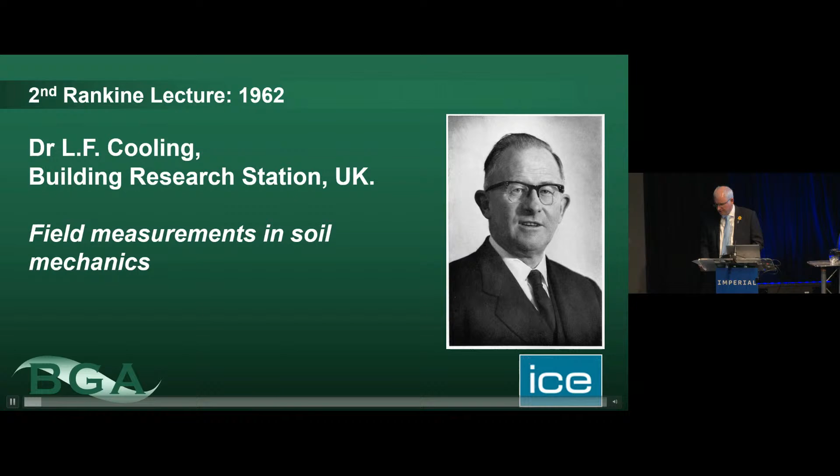Kenichi Soga, the Donald H. McLaughlin Professor of Mineral Engineering and Distinguished Professor of Civil and Environmental Engineering at the University of California in Berkeley.

The title of his lecture is From Geo-monitor to Geo-adapt, Leveraging Distributed Sensing and Data Analytics for Performance-Based Design, Construction and Maintenance. I now call upon Professor Malcolm Bolton of the University of Cambridge to formally introduce the lecturer.

When appointing a new academic colleague, there are a few essential attributes that one should look for. Have they an interesting story to tell? When asked a question, can they organize their thoughts quickly and answer clearly? Do they know the scholarly essentials of their discipline, and can they teach them?

At a more strategic level, our previous head of department at Cambridge, Anne Dowling, spoke of the search for the T-shaped academic, somebody with strong roots in a recognized discipline, who was beginning to grow a strong stem of new knowledge, but also someone who showed signs of branching out to connect with other disciplines and to address unexplored challenges.

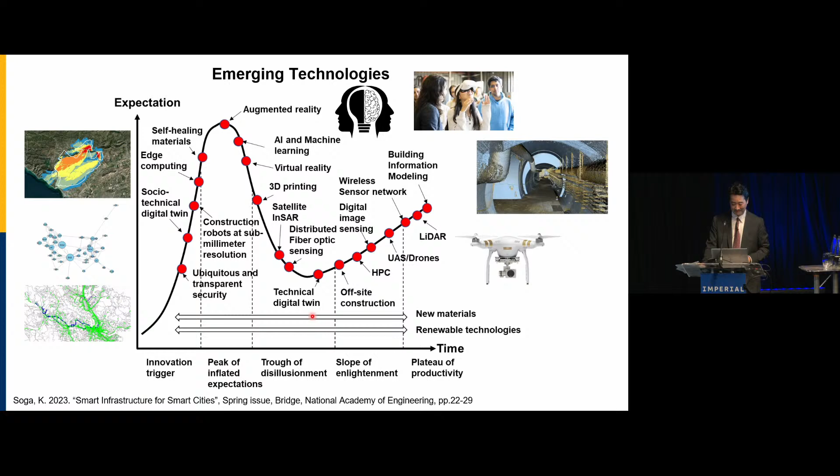Today's focus is geotechnical monitoring for detecting movements. We now employ technologies such as computer vision, LiDAR, and UAV to capture infrastructure movement. We also began using satellite-based monitoring. The development of wireless sensor networks over the past decade has provided significant opportunities for us to continuously monitor geotechnical structures, particularly in remote and difficult to access locations.

Later in this presentation, I'll discuss the potential role of distributed fiber optic sensing. The key takeaway from this slide is the range of precision offered by these technologies. Data accuracy varies from 10 to 20 millimeters using satellite measurements to sub-millimeters, less than 0.1 millimeter, with camera-based and fiber optic sensing technologies. As a geotechnical engineer, this level of precision is essential for us to make informed engineering decisions.

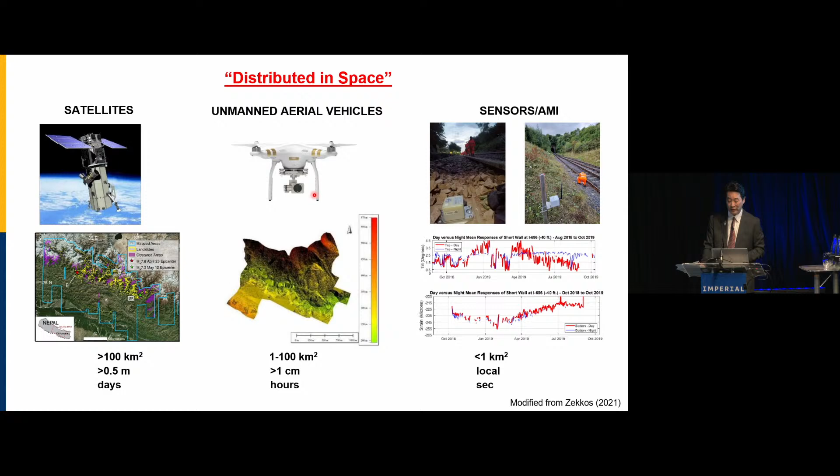For me, distributed sensing refers to measurement that distributes across space, time, and multiple sensors. The slide illustrates the spatial variation captured by different sensing technologies like satellites, UAVs, and sensors at local scale. It demonstrates how these technologies enable infrastructure monitoring across various spatial scales.

During my time at Cambridge, we worked on developing a wireless sensor network system. Over time, this technology has evolved to support large mesh networks. These networks can achieve hopping distances of over kilometers, enabling spatial coverage through multiple interconnected wireless sensor networks, as well as creating redundancy to the system.

One of the most significant achievements in wireless sensor technology is power efficiency, which enables data collection over varying time intervals. For certain measurements, a low sampling rate is sufficient. With current technology, if readings are taken once every hour, batteries such as these can sustain monitoring for 20 to 25 years without changing them.

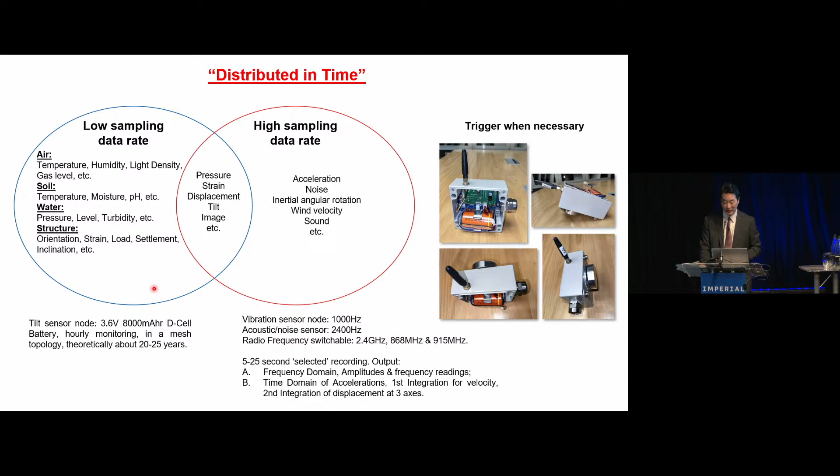However, some measurements, such as acceleration and noise, require high-frequency data collection, especially during crucial times. Since a large volume of data is generated, these batteries cannot sustain continuous signal transmission for a long period. The key innovation lies in the ability to trigger data collection only when necessary, optimizing power consumption while ensuring crucial data is captured when needed.

Sensors can be strategically distributed within a system to capture detailed and continuous data. For example, the tunnelling machine is equipped with numerous sensors that record hundreds to thousands of data variables every few seconds. As the machine advances by just a few millimeters, it generates vast data sets, providing valuable real-time insights into its operation and performance.

In this conventional approach, we establish performance thresholds based on statistical distribution or engineering experience. However, in some cases, an accident may happen and performance unexpectedly falls below the defined limit. When this happens, we recalibrate the threshold. Sometimes accidents may still occur due to previously unidentified mechanisms, requiring further adjustments to these limits.

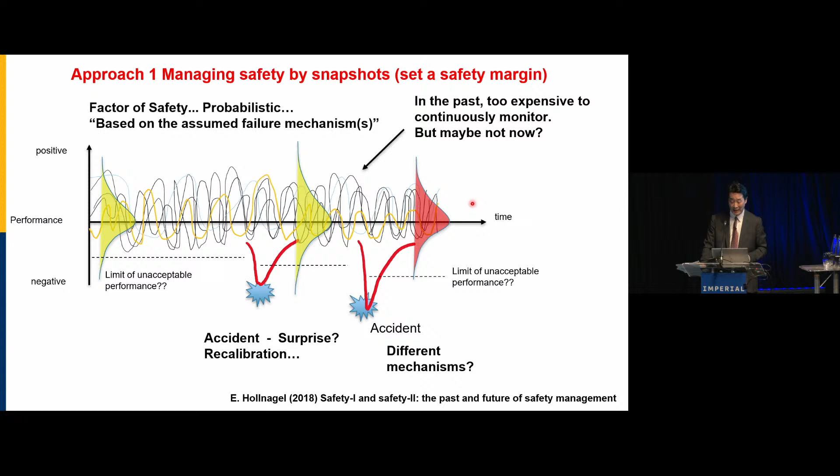In the past, continuous infrastructure monitoring was very expensive. However, with advances in sensing technology, continuous monitoring is now becoming economically feasible. With new sensor technologies and data analytics, we can now continuously measure and assess infrastructure performance.

In psychology, this approach is known as managing safety through everyday work. If we know the actual performance, we can learn how to react quickly if an event begins to unfold.

We can manage future unknown demands by reducing unknown risks. We can identify potential improvements in the design and construction processes. From a circular economy perspective, having knowledge of material performance enables resource conservation, component reuse, and sustainable design.

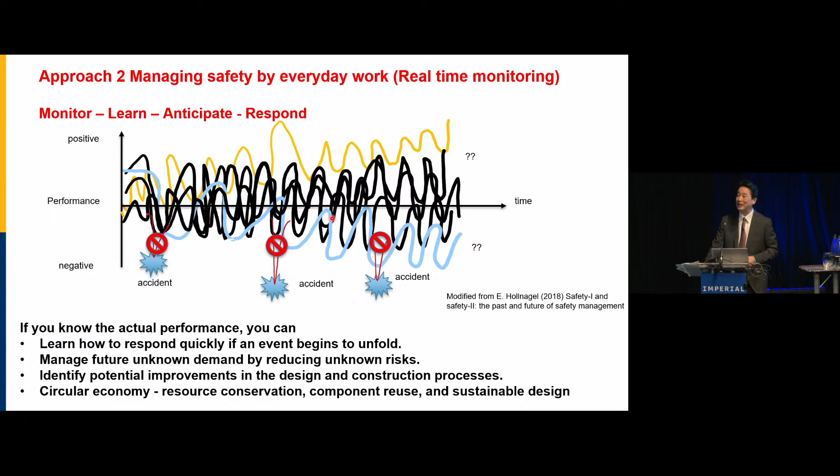Early in my career, I worked with data analysis related to the self-boring pressure meter, and then developed a self-boring permeameter with Clive, his colleague Robert Whittle, and my students. I'd like to take this opportunity to acknowledge Clive Dalton's contributions in geotechnical engineering.

The technology I'm going to present today is mostly distributed fiber optics technology, which enables continuous measurement or monitoring of strain, temperature, vibration, or noise along the length of a fiber that can span many kilometers.

I began working in this technology approximately 20 years ago because of Rab Fernie, a former chairperson of the British Geotechnical Association. He simply suggested I should explore this technology. And I did, and realized its potential for geotechnical engineering.

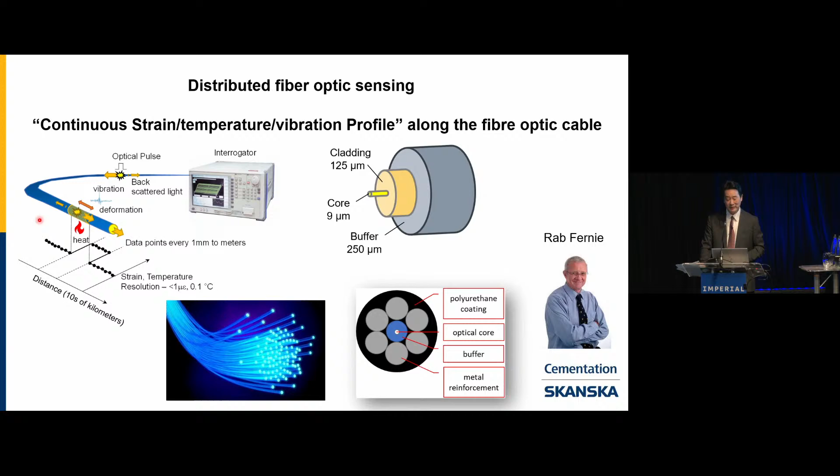This technology suits our field well because strain distribution in geotechnical structures varies spatially due to the distributed load exerted by soil. The first field trial was conducted in collaboration with Cementation Skanska and the Building Research Establishment.

This technology can be categorized into distributed temperature sensing (DTS), distributed strain sensing (DSS), and distributed acoustic sensing (DAS). The fundamental principle is the transmission of light through an optical fiber.

As the light travels, a small portion of light is backscattered at every point along the fiber. Since the speed of light is constant, at least where we live, the exact location of each backscatter signal can be determined through precise time measurements.

Then, by analyzing the frequency component of the backscattered light coming back from a given location of interest, we can extract information about the strain, temperature, acoustic vibration, or sound at that point. And this can be done for every point along the fiber.

While I cannot go into the technical details today, the key point is that this technology allows us to measure these physical variables continuously over long distances.

Let's consider an example of a pile. As a load is applied at the top of the pile, strain develops within the pile. The largest strain occurs at the top and gradually decreases with depth due to shaft friction.

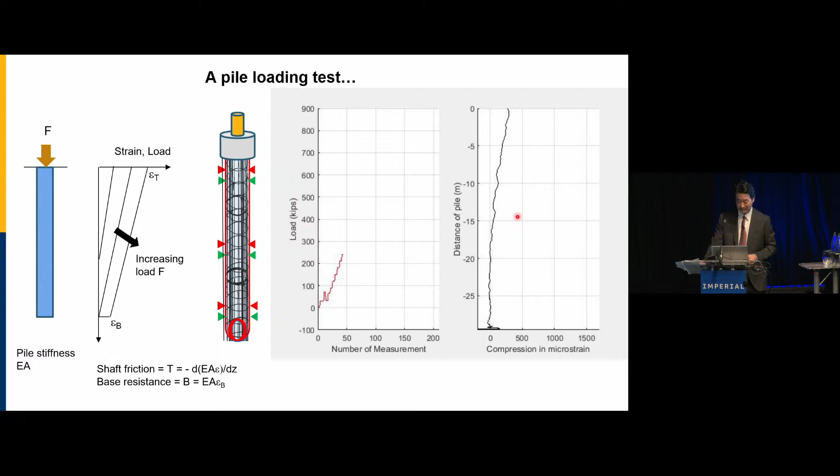The objective today is to explore the process of monitoring, learning, anticipating, and adapting in geotechnical engineering. I'll introduce new emerging sensing technology and data analytics technologies. I'll present 3 cases on tunnel, pipelines, and piles.

These case studies will examine how soil profile and construction process influence the performance of geotechnical structures. I'll also discuss how I assess actual performance versus assumed performance to derive the underlying mechanism that governs the behavior. By acknowledging the uncertainty and improving our ability to anticipate the performance, we can enhance decision-making in geotechnical engineering.

One key discussion point will be the utilization of the concept of cautious and most probable, which some of my geotechnical engineering colleagues have recently introduced within the framework of the observational method, originally proposed by Professor Ralph Peck.

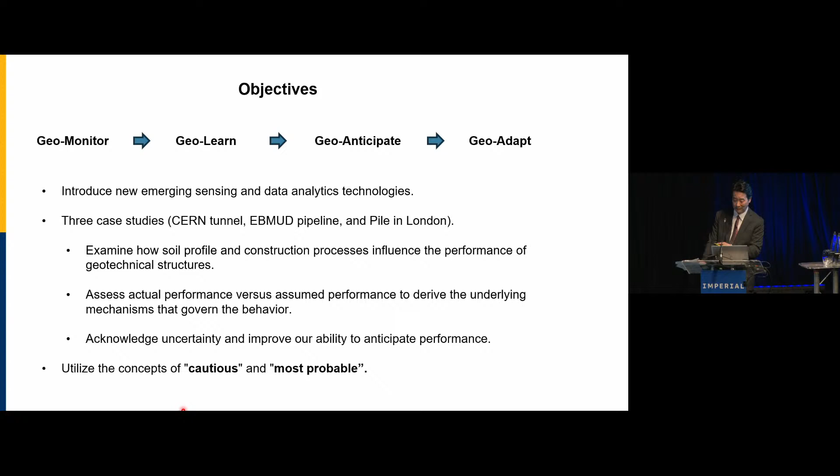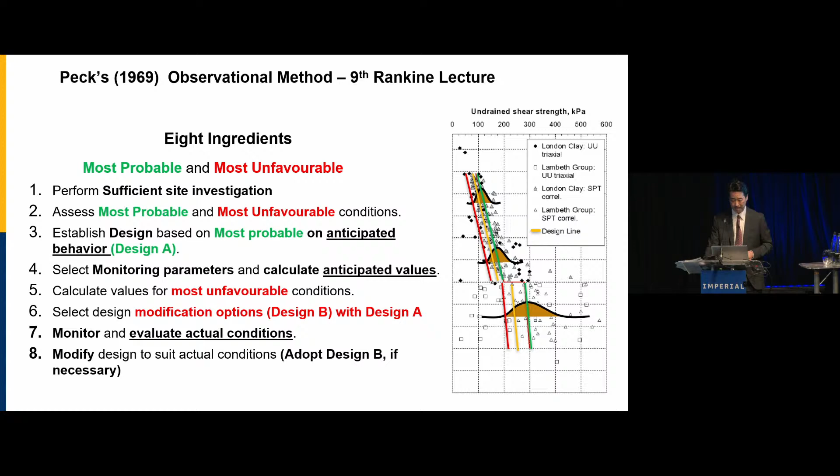Our engineering parameters, such as strength and stiffness, often exhibit statistical variability. While the distribution shown here looks like a normal distribution, it doesn't necessarily have to be. But most probable is probably located at the 50th percentile.

In contrast, the cautious value, which is commonly used in geotechnical design, is often set at approximately 1 standard deviation below the average. For the most unfavorable scenario, engineers may consider a 1 in 1,000 probability, or apply a factor of safety to the cautious parameters. In comparison, structural engineers, who often deal with brittle materials, may adopt a 1 in 20 value as a conservative estimate.

Just to remind you, Professor Peck was using this for temporary structures.

In monitoring, we typically establish target values and categorize them into different zones using a color-coded system: green, amber, red, to define thresholds. In the US, we actually use yellow in traffic signals, but I'm in the UK now, so I'd like to use amber.

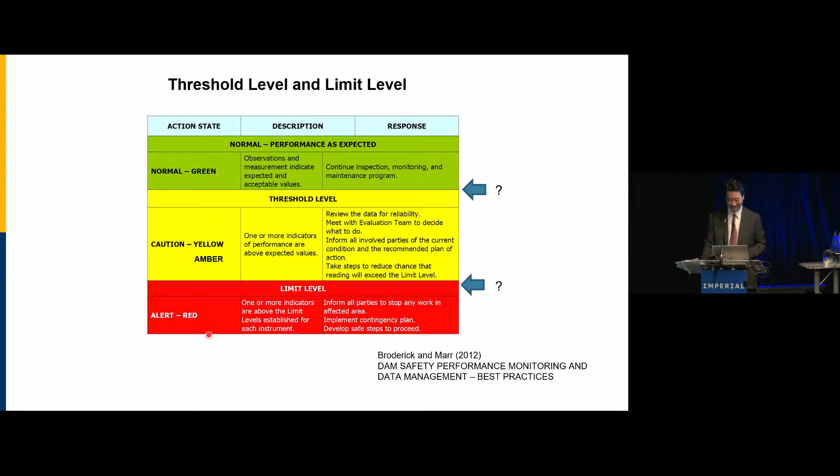In geotechnical engineering, uncertainty extends beyond engineering properties. We must also account for uncertainty in action loads. There are always uncertainties in the selection and application of the mechanism or models, and in construction-related activities.

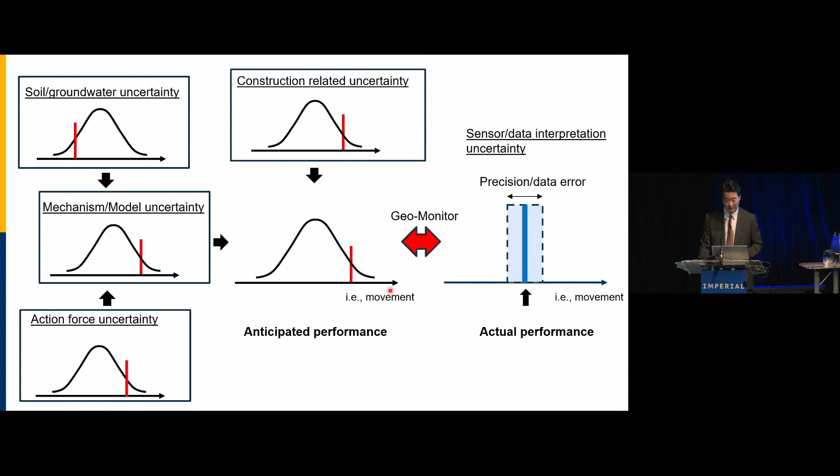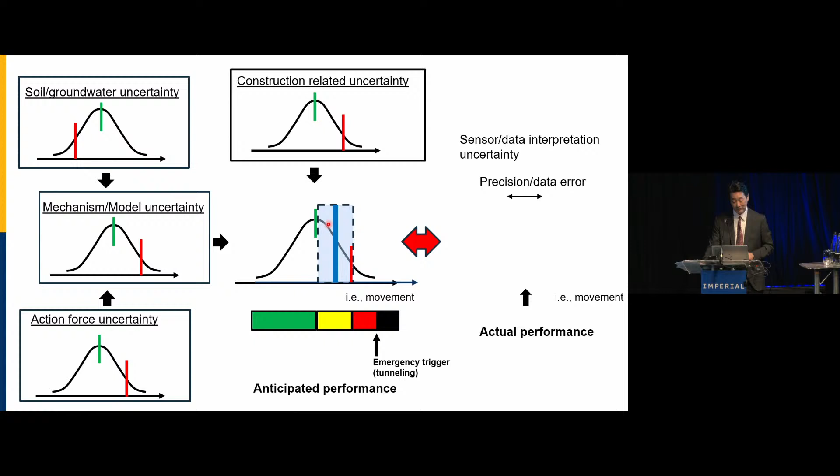The cautiously designed object with cautiously engineered parameters will give the red prediction. However, we can reanalyze the same design using most probable parameters to find our 50-50 green position. And you can start comparing that with your monitoring. Are you below green? Are you between green and red? Or are you in red? That can potentially give you the green, amber, red position as shown below.

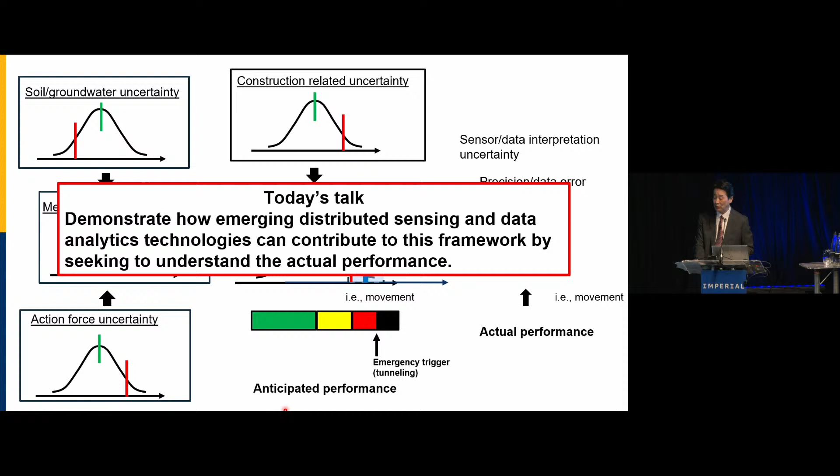Today's talk will demonstrate how our emerging distributed sensing and data analytics technologies can contribute to this framework by seeking to understand the actual behavior. So let's start with my tunneling case. In this section, I will discuss the uncertainty related to ground condition and action forces.

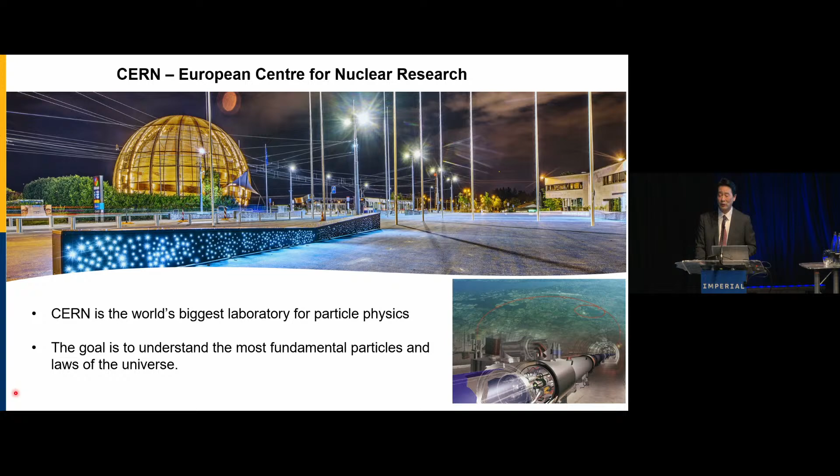The first project I'd like to introduce is based at CERN, the European Centre for Nuclear Research. CERN is the world's largest laboratory for particle physics. It has an extensive network of tunnels of more than 80 kilometers. There are two main accelerator rings. The largest is the LHC, which has a circumference of 27 kilometers. And then there's an older and smaller accelerator, the SPS, with a circumference of 7 kilometers.

The SPS was constructed in 1974, about 50 years ago. Today I'll focus on the TT10, which was built around that time, shown at the star location on this slide. The TT10 tunnel connects the proton synchrotron, shown here, to the SPS, shown here. Constructed in 1972, it features an incline tunnel with a horseshoe-shaped design.

The tunnel consists of primary lining and secondary lining with a waterproof membrane positioned between them. There's also a drainage system integrated along the side to collect groundwater. Seepage waters gather at the bottom of the tunnel and are pumped out. This means the tunnel is designed to be drained.

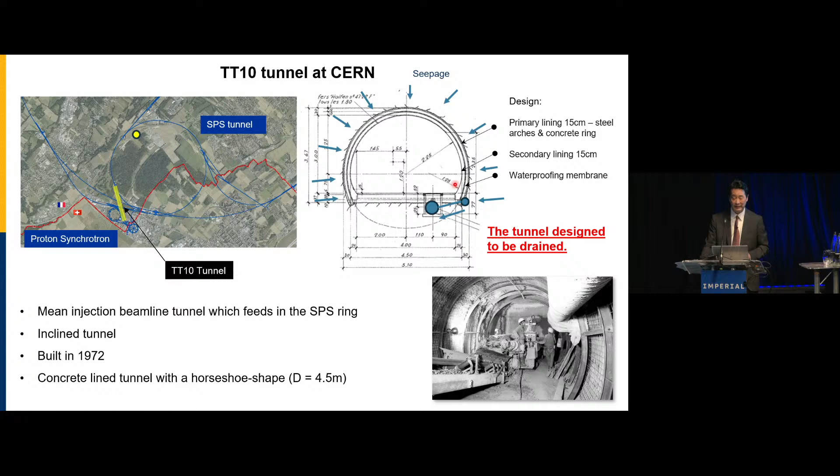The geology consists of two primary layers. The upper layer is moraine, which is a permeable deposit, while the lower layer is molasse, which comprises alternating layers of sandstone and marls with varying thicknesses. The tunnel is situated within this molasse formation. As illustrated in this figure, the molasse is further subdivided into layers of sandstone and marl, with unique characteristics that influence tunnel behavior.

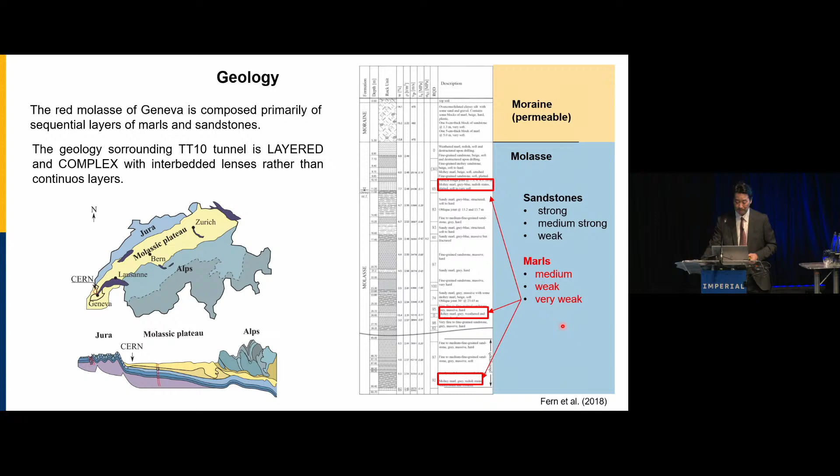Due to the tunnel inclination, the ground behind the tunnel varies at different locations. A series of two-dimensional finite element analyses were conducted for this project to assess the impact of soil layering on tunnel performance. Several finite element models, developed by Vanessa Di Murro, a PhD student at the time, are presented here.

This diagram shows the geological cross-section along the tunnel axis. So the geology changes as you go along the tunnel. The weakest geological layer encountered is called lumpy marl, or very weak marl, which is likely to swell. The photograph on the right displays core samples of lumpy, very weak marl, illustrating its progressive degradation over time.

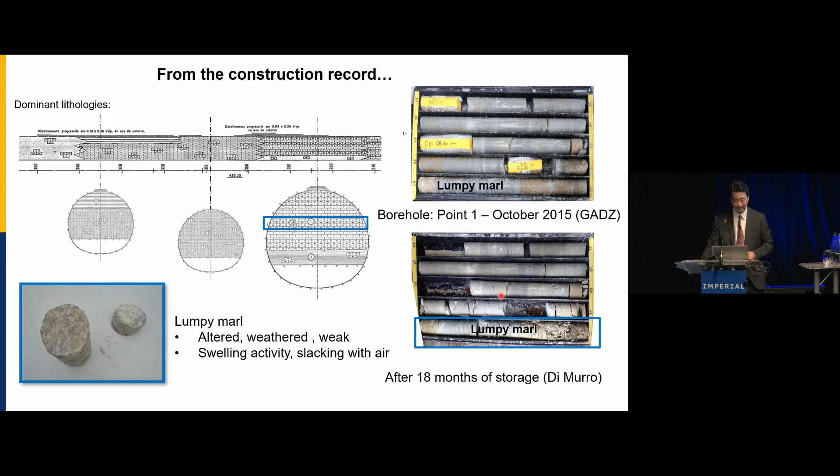To confirm the deformation mechanism, a distributed fiber optic sensor was installed at two sections along the tunnel, CERN-1 and CERN-2. The sensor cables are attached in the circumferential directions, as shown here, at various locations in CERN-1 and CERN-2. These cables were routed to the surface through a shaft, enabling remote measurements, as direct access to the tunnel was not possible during the particle physics experiments. Given that the tunnel is in a radioactive environment, the radiation-resistant properties of the fiber optic cables provided an additional advantage.

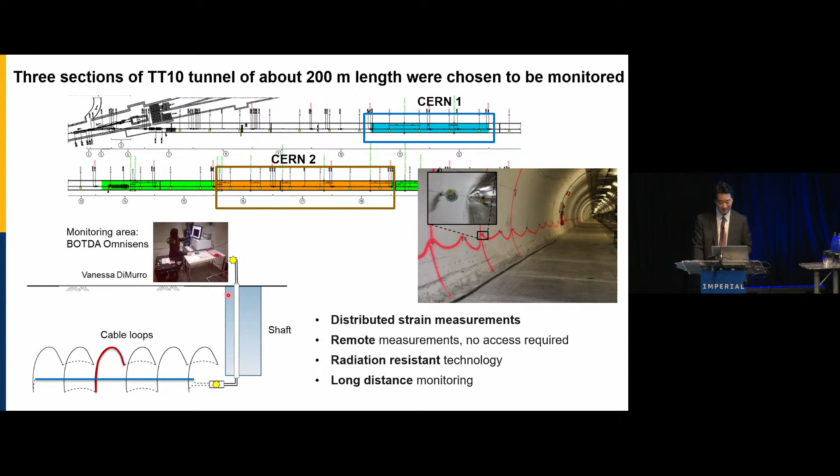We all know that tunnel construction alters the drainage condition. Initially, immediately after tunnel construction in clay soil, the pore pressure may change due to shear-induced excess pore pressure and a little unloading under undrained conditions. However, in this case, drainage begins as the tunnel boundary remains at atmospheric pressure, effectively acting as a drain. This process increased the effective stress around the tunnel, leading to ground consolidation. Over time, clogging occurs, water pressure behind the tunnel rises, reducing the effective stress, causing the surrounding soil to swell.

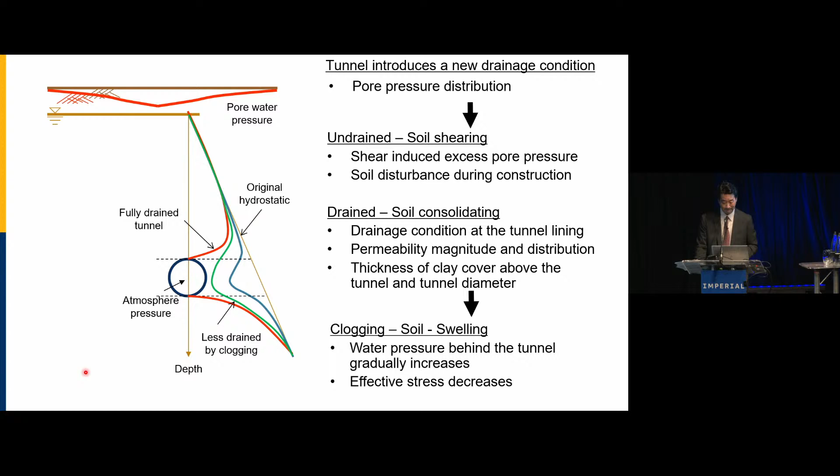This slide shows the tunnel deformation mechanism at different stages. According to Professor Mair's Rankine lecture and our subsequent research, the tunnel often undergoes squatting deformation during the consolidation stage. While consolidation of the surrounding ground can take many years, tunnel deformation occurs shortly after excavation, as the soil near the tunnel is close to the drainage boundary. However, as clogging starts, an opposite trend is observed and the tunnel elongates.

The CERN-2 section exhibits significant variation in tunnel deformation. At higher elevation, shown as number 1, the tunnel was surrounded by uniform marl and elongation was minimal. Going deeper, at a lower section, the geology changed with medium weak marl on top and marl at the bottom. Here, strain values were about 100 to 200 microstrains.

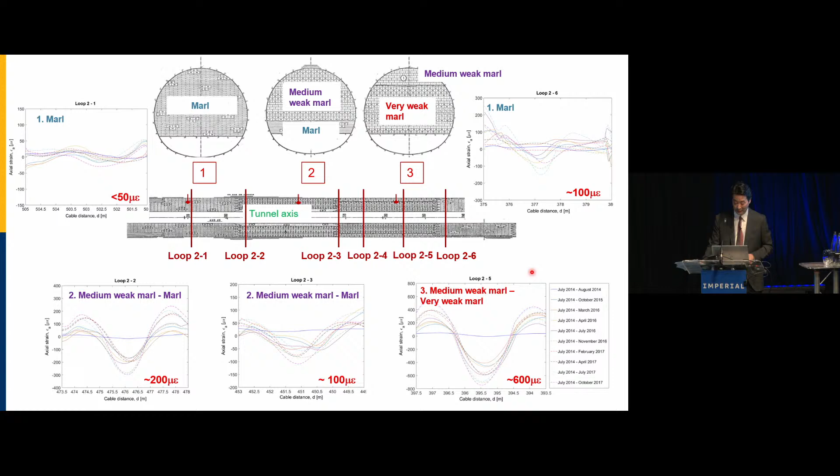However, when the tunnel passes through the section of medium weak marl on top and very weak marl at the bottom, the strain recordings were significantly higher. Once the tunnel transitioned back into the marl, the strain level decreased again.

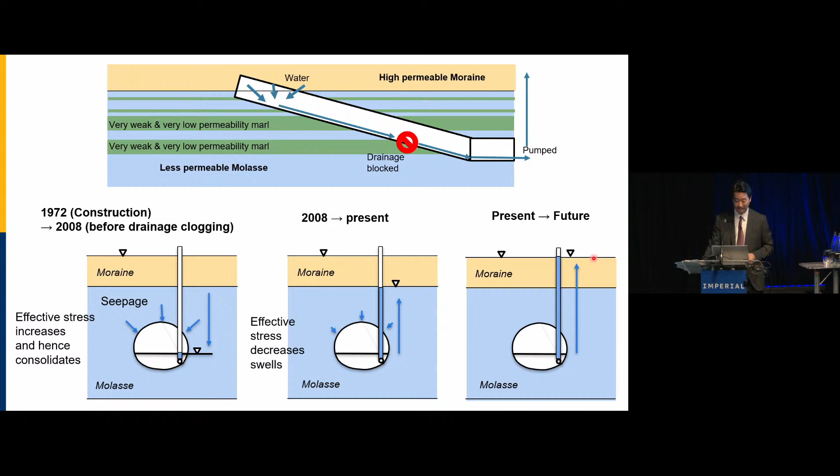Two different soil models were used for simulation. The first was the conventional Mohr-Coulomb model, while the second was a more advanced nonlinear anisotropic-based critical state soil mechanics model that we used previously for London clay. Both models exhibited similar trends in deformation behavior.

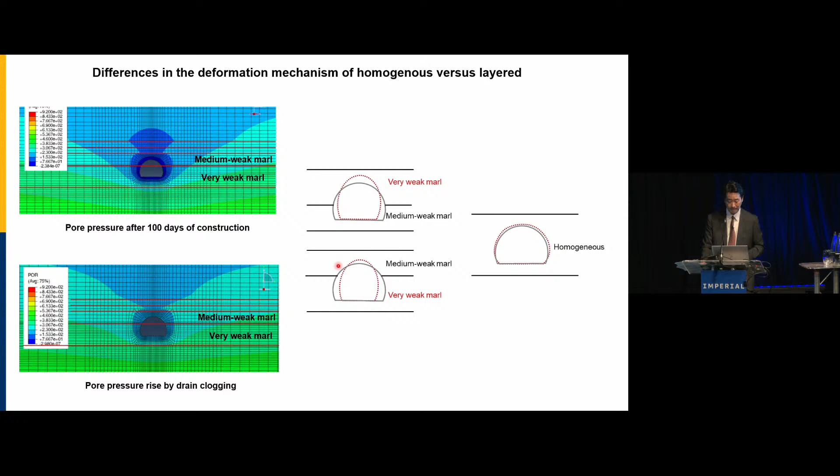While I present this case, these findings may be very obvious to you, but they were not very obvious to us at the beginning. We realized the significance of soil layering and tunnel behavior with changing water pressure through a gradual process of understanding what was going on. Monitoring provided initial insights into the deformation mechanism, but we were very puzzled by the magnitude or variation of these effects.

This led to a deeper understanding of the impact of soil layering using finite element simulations. This study showed the importance of accurately capturing ground conditions during construction to ensure long-term stability of our infrastructure.

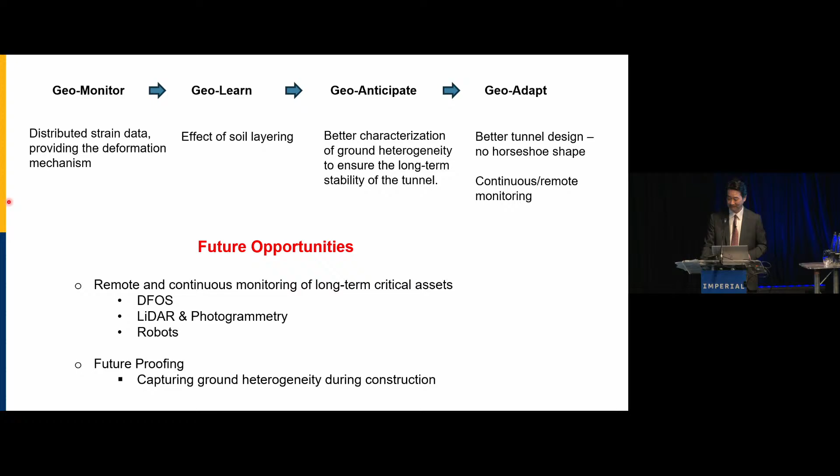For example, CERN is using laser scanning and photogrammetry to assess changes in their assets.

Very nice, isn't it?

In collaboration with the University of Cork, they're using AI-based crack detection technologies.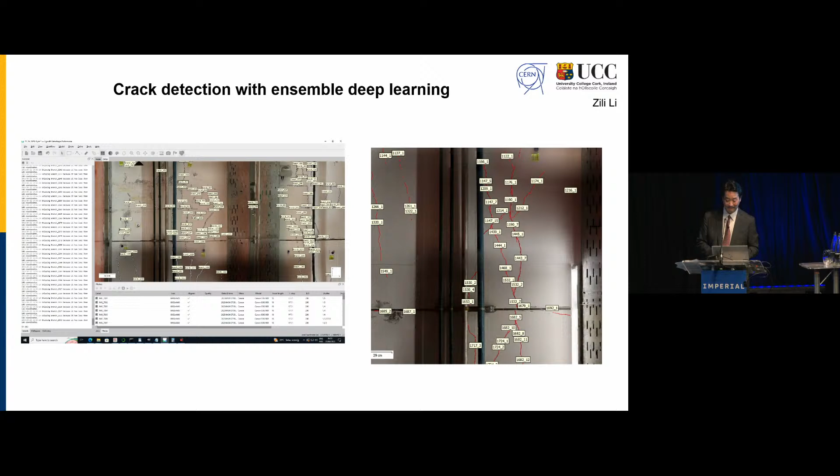At UC Berkeley, our research focused on leveraging massive data from tunneling machines and applying machine learning techniques to enhance analysis and prediction capabilities, including capturing ground conditions.

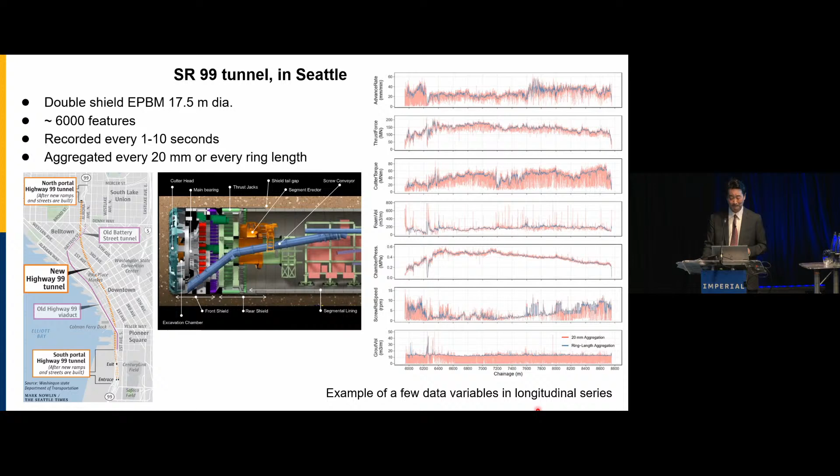Perhaps we can think of the tunneling machine like a giant CPT. Both penetrate the ground and both produce signals. But CPT produces 2 or 3-dimensional data, whereas TBM produces high-dimensional data sets. CPT has a constant penetration mechanism, whereas TBM has a complex penetration mechanism. The complex interactions among features are recorded in these high-dimensional data sets.

In this animation, the borehole data serve as ground truth as the tunnel advances. A data-driven geological model is developed by sequentially linking borehole data with tunnel machine data as it advances. Blue represents clay soils, while orange indicates sandy soils. It appears that the geological interpretation made by the expert, shown above, is similar or closely aligned with the machine learning model-driven interpretation shown below. So the blue is the clay one, and the sand is the orange one.

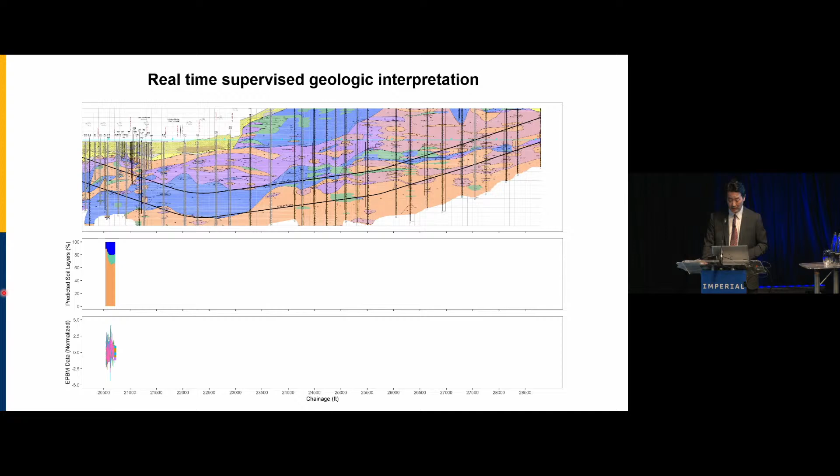When a particular section is examined closer, small pockets of silt and fine sand, represented by green, as well as till deposits, represented in purple, can also be observed in this section. The machine learning model appears to capture these localized features along with the overall transition from clay to sandy soils. So this enables the potential for automatic real-time identification of ground conditions during construction, which can be used for future-proofing.

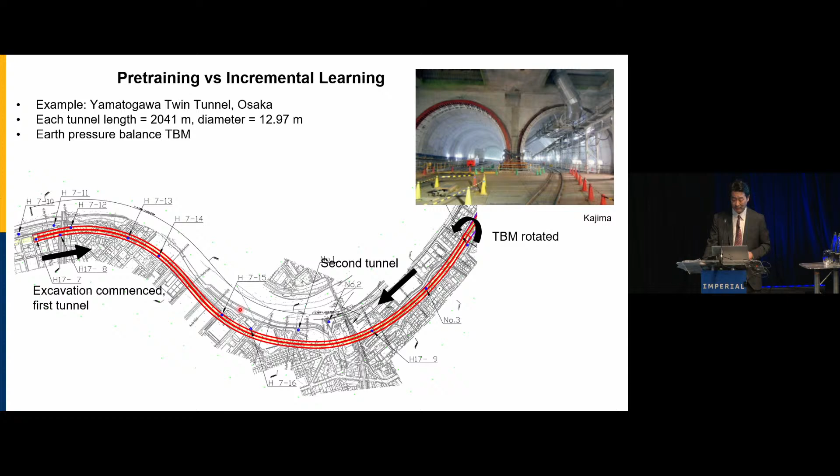The geological interpreted profile from the borehole along the tunnel alignment is illustrated in this figure, where clay is represented in blue, orange is gravel, and sand is in yellow.

Machine learning models were developed to interpret geological conditions based on tunneling data. In case one, a model was trained using data from the first tunneling drive and then applied to predict the geology from the tunneling data of the return drive, but the model was not updated sequentially. So we only used the data model from the first drive.

In case two, the data from the first drive was not used. The sequential modeling approach was used for the return drive only, similar to the one I just showed you from the Seattle case, and the first drive was used in case one.

In case three, the model was initially trained on the first tunnel drive, but the model was sequentially improved during the return drive. The geological interpretations produced by these three models are shown on the right. Of course, we don't know what's happening between the boreholes, but the only thing you can do is compare with the borehole data. And when compared to the borehole data, case three is obviously better than cases one and two. In other words, a machine learning model has to keep on learning, as well as we do.

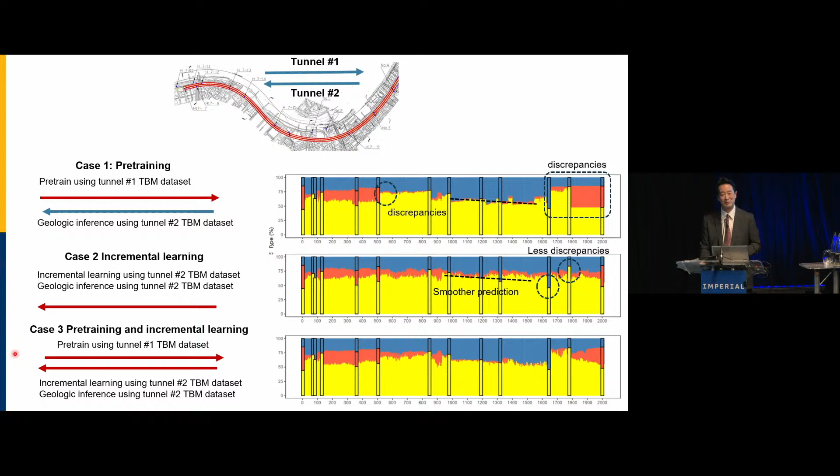But due to the complexity of these interactions, direct interpretation is not very straightforward. However, we can utilize advanced tools such as Bayesian networks and structural learning algorithms to analyze machine learning outputs. In this study, two sets of data, one from clay soils and the other from sandy soil dominant conditions, and interaction diagrams for each soil type were created.

The results indicate strong conditional dependency between advance speed and chamber pressure when the machine is operating in clay soils. This suggests increasing chamber pressure is closely linked to the tunneling speed advancement being made. In sandy soil, a strong conditional dependency was observed between screw conveyor operation, or screw conveyor rotation speed, which is often controlled by the operator, and the chamber pressure.

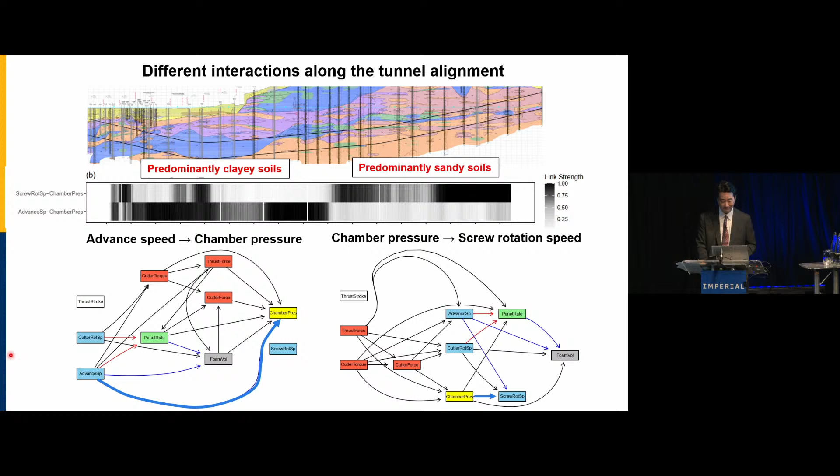Are you still okay? I'm going to move on to part two: buried infrastructure.

This section discusses buried infrastructure pipelines. Many water pipelines in London, I assume—I think I remember that—and in the Bay Area where I live, are old, leading to an increasing number of water main failures.

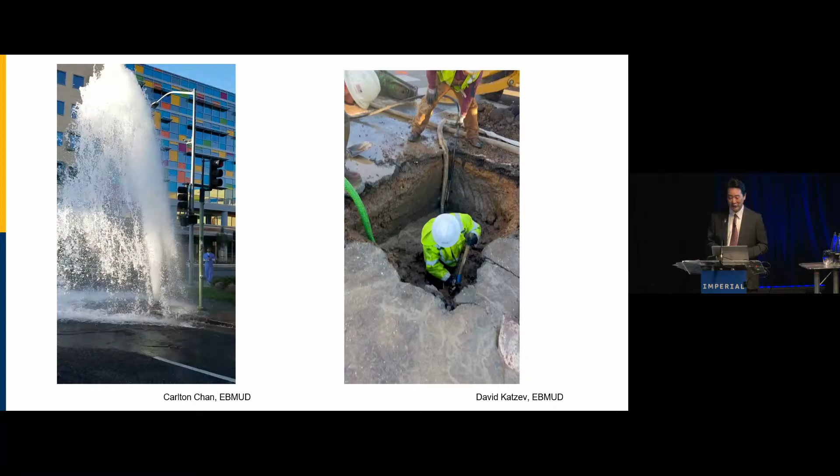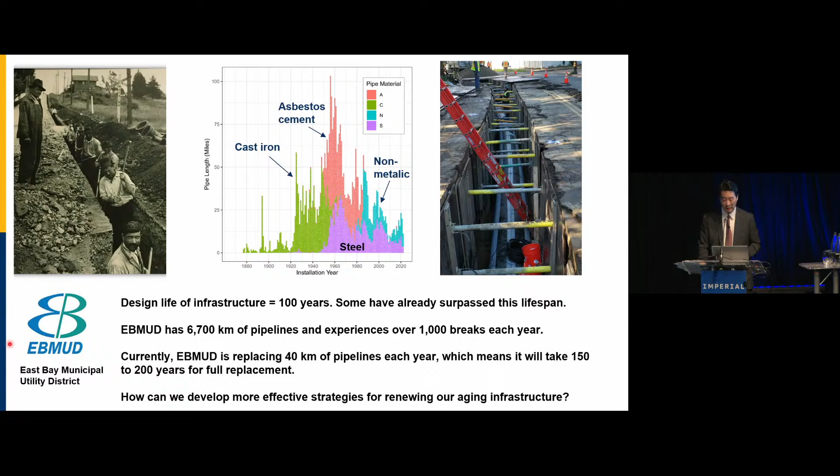So in collaboration with East Bay MUD, we had the opportunity to install fiber optic cables on two newly constructed HDPE plastic pipelines. The Hayward Fault is a right lateral strike-slip fault where the left side moves northward and the right side moves southward. The two pipelines have diameters of 0.9 meters and 0.55 meters.

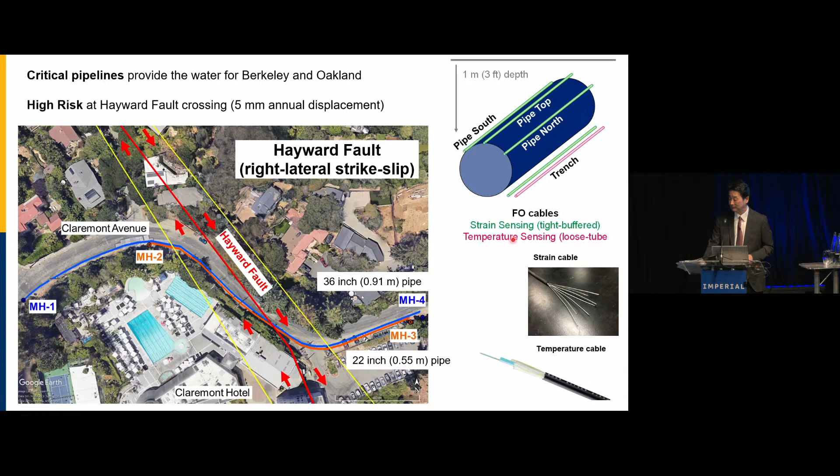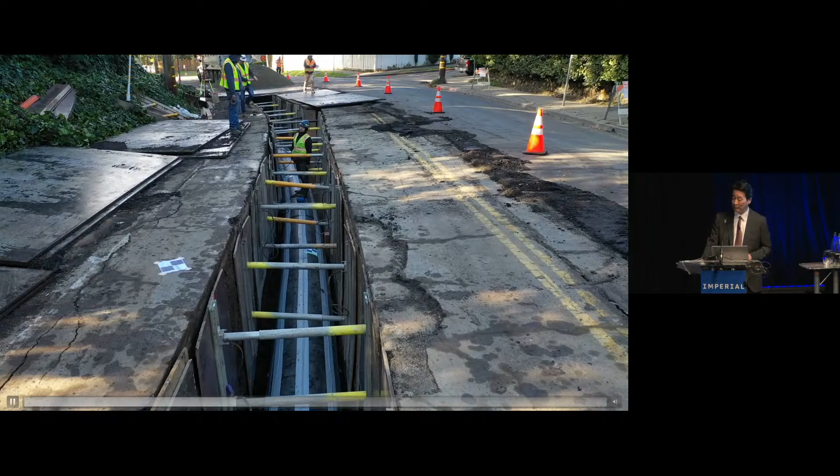This video presents one of the instrumented pipelines installed within the trench. Three distinctive lines run along the pipeline, indicating the placement of fiber optics. These cables were placed beneath the tapes using epoxy adhesive to ensure firm adherence.

Please note there's a small gap between the trench and the pipeline. The gap is rather small. The trench was filled with sand near the pipe, but not compacted well, and gravel was placed above near the surface with good compaction.

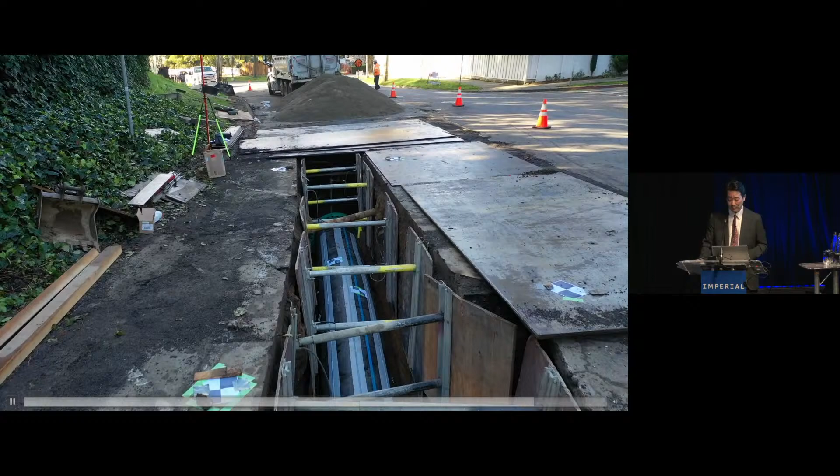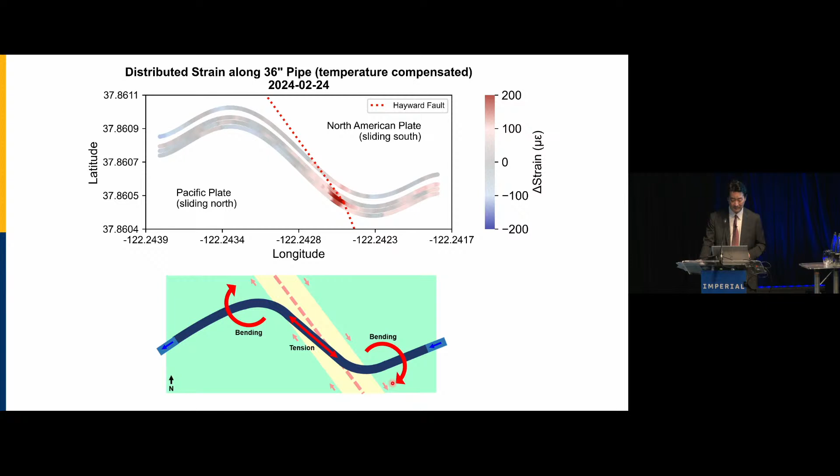Seasonal variation are evident, with slight compression occurring in the winter and minor extension in the summer due to the thermal contraction and expansion of the plastic pipe. However, such thermal-induced axial movement is constrained by soil resistance in the axial direction.

On the other hand, the axial extension around the sort of area of the fault zone is about 4 millimeters. This is due to localized strain accumulation over the region that I showed you earlier.

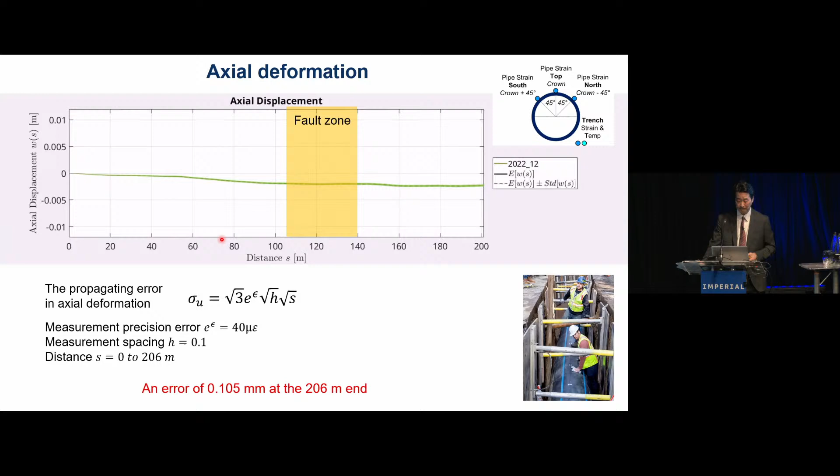We have two fiber optic cables on the two sides, opposite of the pipeline. These data sets allow us to derive the bending strain, which can then be integrated twice to estimate the lateral displacement of the pipeline, assuming pin boundary condition at both ends. This video represents the results.

Actually, it shows a surprisingly lateral movement of approximately 100 millimeters, about 10 centimeters movement. Error estimates indicate uncertainty of about 15 millimeters at the midpoint, which is smaller than what we measured, which is 10 centimeters or 100 millimeters. So at the beginning when I saw this, it was really difficult, hard to believe.

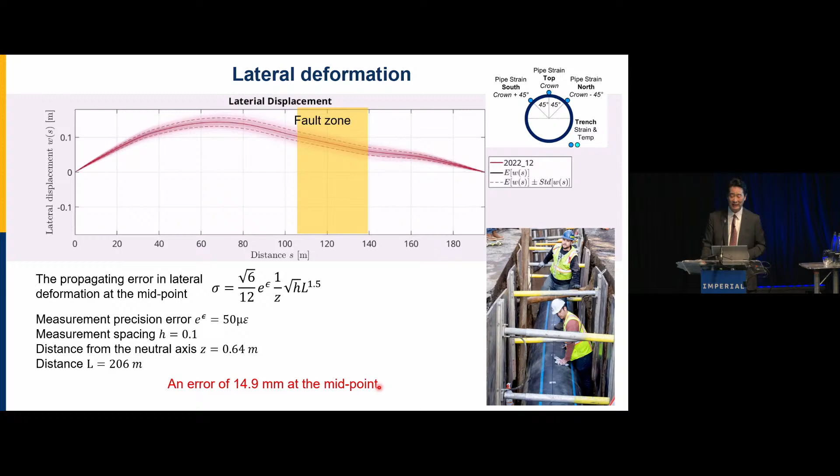Construction photographs shown earlier indicate that the trench was narrow, and it is unlikely that proper soil compaction was achieved around the pipe. However, the location of maximum lateral movement depends on actual resistance of the soil.

More work is needed to develop a predictive model, but the key takeaway is that daily and seasonal variation must be thoroughly understood before assessing the effects of fault movement on pipeline displacements.

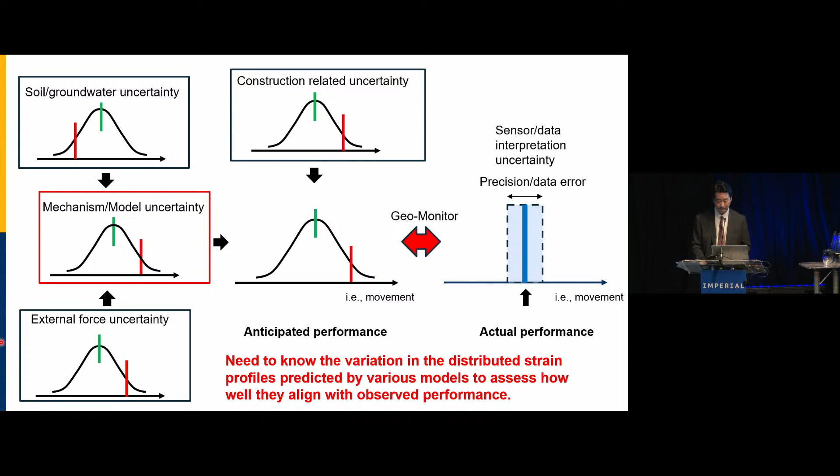An analytical solution can be derived by incorporating key factors such as soil-pipeline interaction in the axial direction and in the transverse direction, the elastoplastic response of the pipeline material itself, and the effects of internal pressure and temperature. Professor O'Rourke's Rankine lecture paper is a good place to start knowing about this.

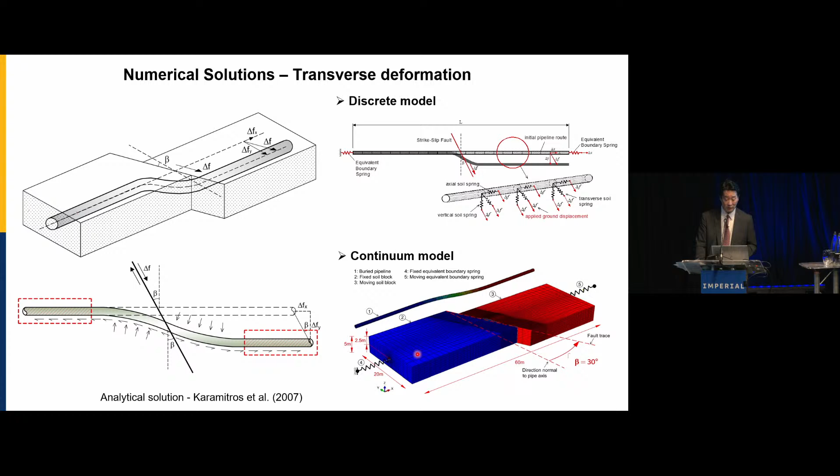A very nice analytical solution for this problem was proposed by Dr. Karamitros in 2007, which is shown here. Additionally, this problem can be approached using numerical methods, such as discrete model using soil spring analysis, or making it fully continuum with soil continuum and pipeline continuum as well. I'll call it full continuum models.

But let's consider a scenario where we have internal pressure applied, and examine the difference in terms of distributed strain profile across the analytical solution, discrete model, and full continuum model. Sorry, this is a bit of a busy figure.

The figure on the left compares the distributed profile predicted by the analytical model and the discrete soil spring model. This is distance, with the fault in the middle, and longitudinal strain on the vertical axis. The top figure represents strain profile for small fault movements, 10 to 30 centimeters, while the bottom figure corresponds to larger fault movement, 50 to 150 centimeters. The strain profiles predicted by the analytical solution are solid colored lines, and those from the discrete soil spring model are dotted lines.

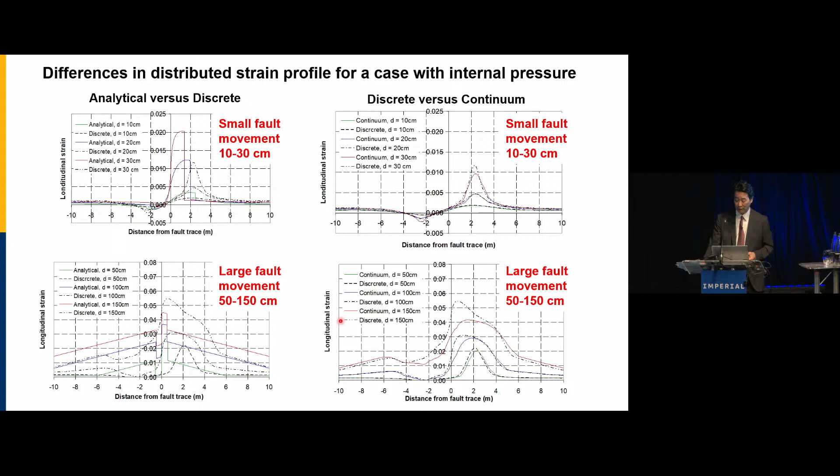The key point here—these are just examples—is that the choice of model also affects the anticipated performance when distributed strain profiles are considered for monitoring.

Actually, in some cases real-world conditions differ from our expectations. At that particular site I showed you earlier, the new pipeline was installed adjacent to an abandoned pipe, as shown in this photo. So it remains uncertain whether the abandoned pipe will provide protection during a large fault movement or contribute to potential damage. It seems better to monitor this pipeline, which is critical for this particular water distribution system.

The key takeaway is that once a pipeline is buried, we're not going to see it for the next 100 years. Therefore, why not embed intelligence during construction for future generations?

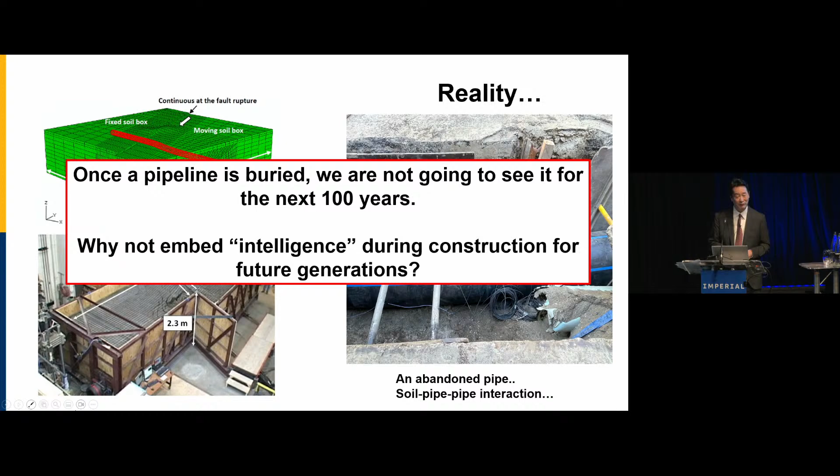In this case study, the monitoring data provided valuable insights into the deformation mechanism of the HDPE pipeline, a plastic pipeline, particularly in response to daily and seasonal temperature variations inside the pipeline.

Understanding these strain fluctuations during normal operation enables better understanding and better preparation for potential strain changes caused by large fault movements during an earthquake.

The pipeline is designed to withstand large ground movement after a large earthquake, but the strain sensors will allow for assessment of its residual life, informing future renewal decisions.

Distributed fiber optic sensors can be adopted for proactive maintenance, ensuring both economic efficiency and long-term safety. So what are the future opportunities?

This slide details our current project with the California Energy Commission and the electrical and gas company PG&E, in which we leverage various distributed sensing technologies—InSAR, LiDAR, UAV, distributed fiber optics, wireless sensing systems—to evaluate the performance of gas pipeline underground movements. The project aims to proactively incorporate distributed strain data sets to enhance predictive model performance, rather than relying on point measurements, over the lifespan of the pipeline assets.

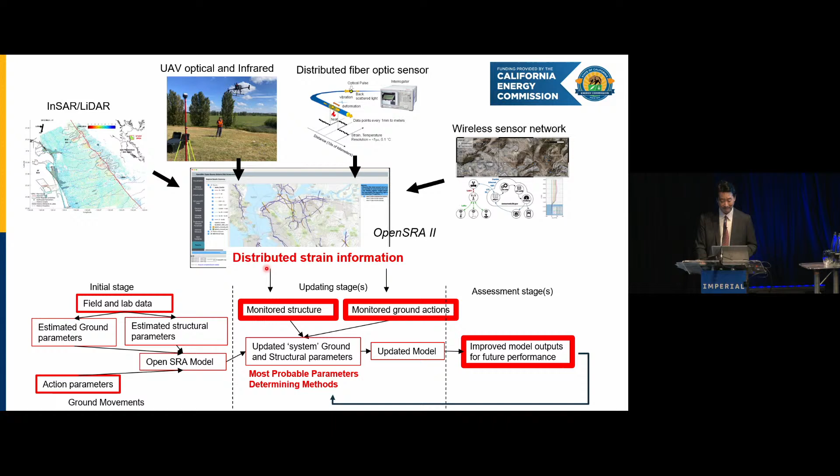For instance, a dog runs, and the movement is detected—actually, the movement strain is about 0.02 microstrain, 20 nanostrain. Similarly, when a person runs, or when you're happy and you hop, the system captures both the hopping pattern and the corresponding strain measurements.

Fiber optics can be equipped with distributed acoustic sensing, functioning as geophones. In this study, a seismic survey was conducted to assess the subsurface condition at a site—the same site I showed you earlier—where fiber optic cables were embedded in the soil. The S-wave velocity maps obtained from distributed acoustic sensing (DAS) and conventional discrete geophones are presented in the slide for comparison.

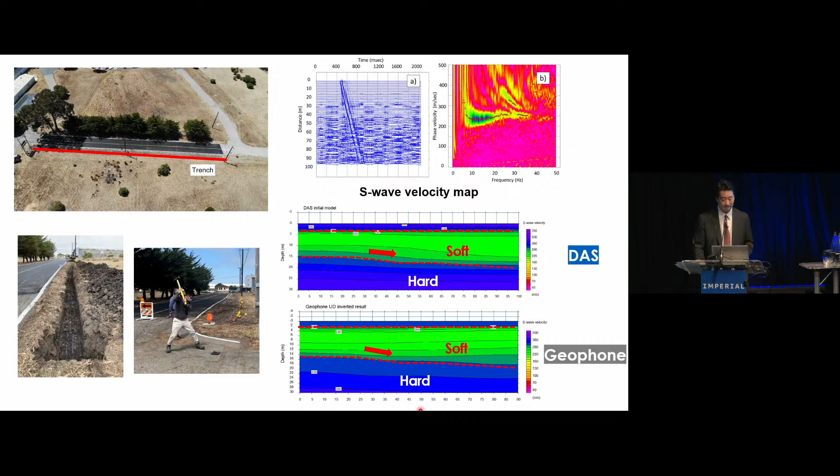Here's a case study in which an existing telecommunication fiber optic cable was used to detect the peak ground accelerations during a small earthquake in San Francisco, shown along this particular line of cable. The level of ground motion is linked to the geological variation at that site, to understand how the ground behaves when the earthquake happens.

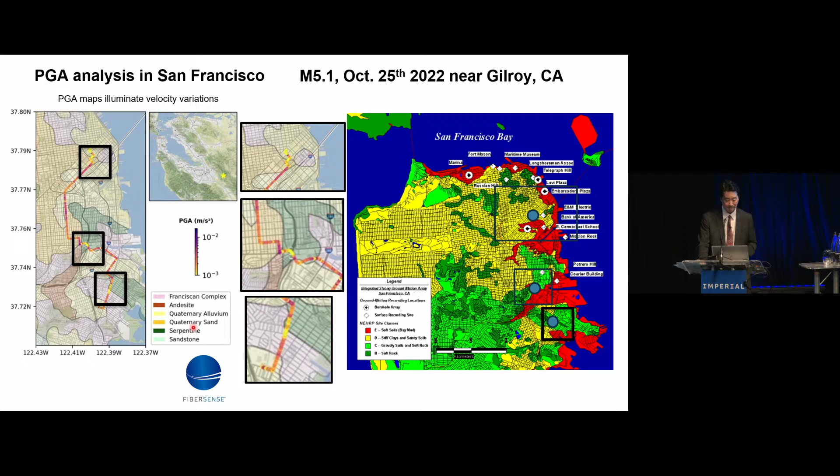So this will be my final section. I hope you're still okay. In this final presentation, I'll discuss deep foundations.

This is a test pile case study at Newfoundland, Canary Wharf, in London. First of all, I'd like to acknowledge my long-term collaborator, Duncan Nicholson, and many of his colleagues who played key roles in the successful execution of this project, as well as many pile projects during my time at Cambridge.

The test pile has a diameter of 1.5 meters and a length of 51 meters. It was equipped with an O-cell, or bidirectional loading device, at the base. The pile was constructed in a soil profile comprising made ground, river terrace gravel, and the Lambeth group, consisting of sandy silty clay and silty clay layers, Thanet sand,

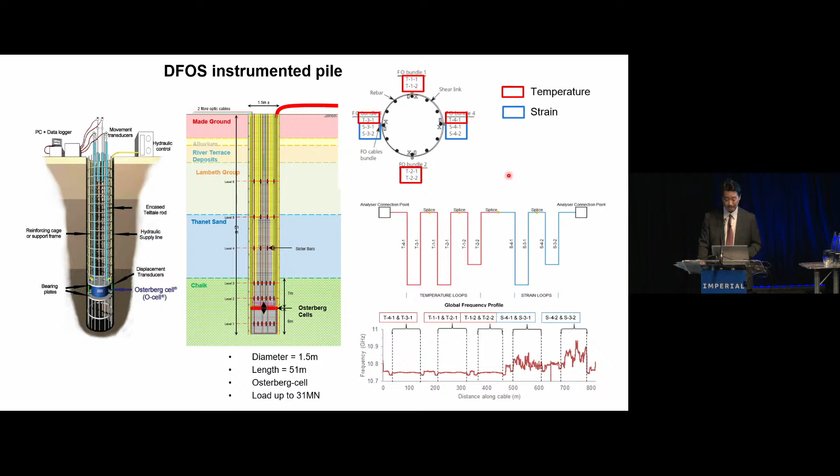and chalk. Fiber optic cables were attached to the reinforcement cage. Four strain gauges were attached to the cage at two sides, and temperature cables were positioned at 90 degree intervals. All cables were connected to a single line, and readings were recorded accordingly. The cables were installed with minimal disruption to the construction process.

The bottom reinforcement cage was first instrumented with the fiber optic cables. As each subsequent cage was lowered into position, the cable on a rotating drum was fed with the cage. The fiber optic cables were attached at several intervals by the construction crew.

In conventional pile loading tests, vibrating wire strain gauges are commonly used. Each requires an individual cable, so when multiple strain gauges are installed, a large number of cables extend to the top of the pile, as illustrated in this photo. In contrast, this instrumented pile with fiber optics has only a few fiber optic cables sticking out of the top. Thick cables are designed for temperature monitoring, while the thinner ones serve as strain sensors.

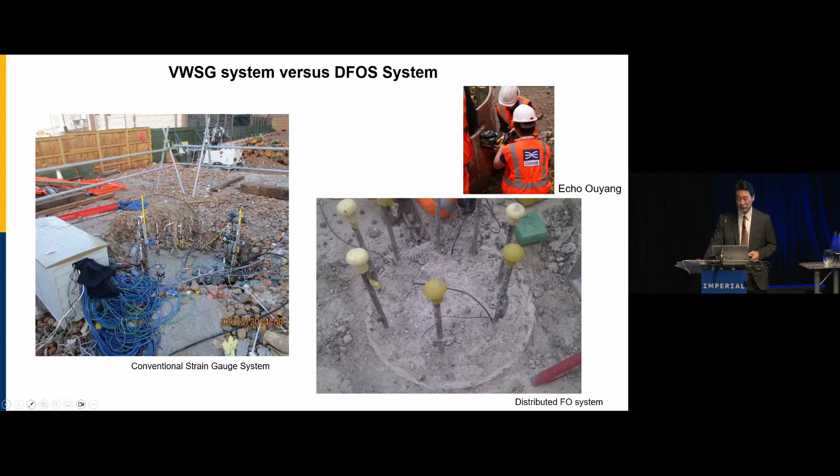Thermal integrity profiling is increasingly being used to detect construction anomalies in piles. This method monitors temperature variation during the hydration and curing process of a concrete pile. This video illustrates how temperature profiles recorded by the four cables change over time.

The temperature rise occurs more rapidly at the bottom, as the concrete was poured earlier. The blue and green line profiles correspond to one side of the pile, while the red and yellow profiles represent the opposite side.

The middle figure represents the temperature profiles at three different times: 4 hours, 14 hours, and 34 hours. So at a given depth, there are four temperature readings recorded at four different locations near the concrete-soil interface, shown here. Examples of two depths are shown in the figure on the right, where you see four data sets at a given depth, showing temperature increase and decrease.

There are 1,000 temperature data points along the 50-meter measurement section for each cable, hence we have 4,000 data sets.

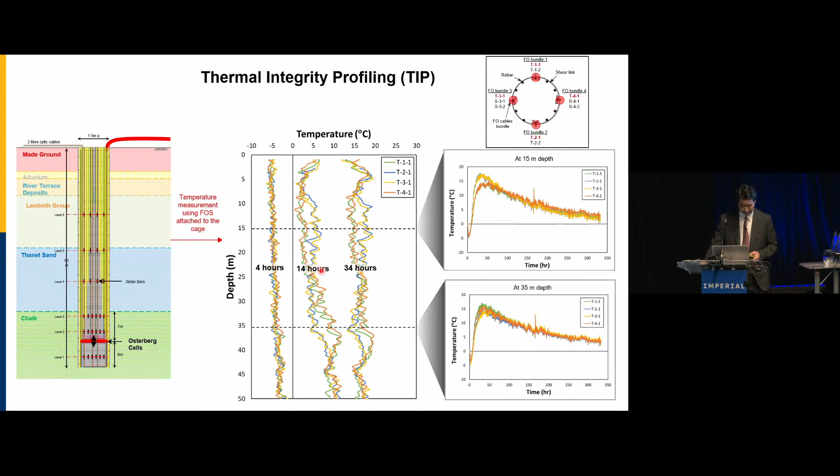Initially, all time-varying temperature data was averaged. The heat source and soil thermal properties were then calibrated to ensure the average FE model accurately represents the targeted pile radius. After calibration, the pile radius at each monitoring point was determined by adjusting the position of the node representing the concrete-soil interface, ensuring the computed measurements match the temperature data.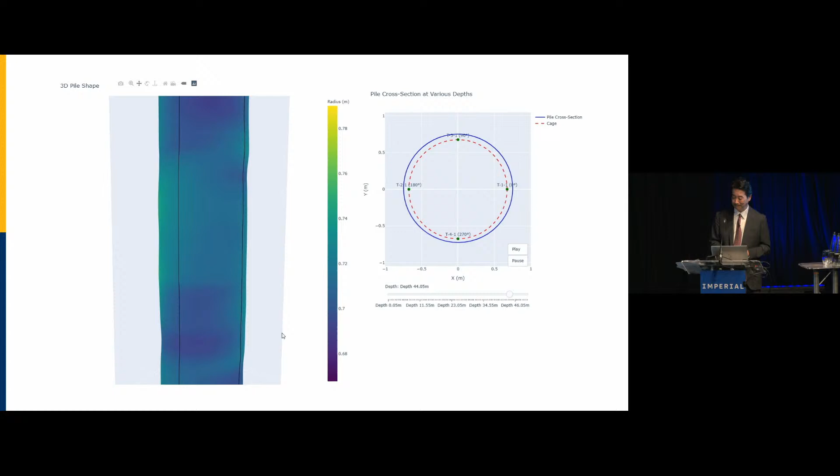As we move, you can see the shape of the pile in true scale, not the real scale, but one dimension. As we move to the following slide, I'd like to remind you that the horizontal axis is exaggerated to highlight the variation.

However, in reality, the spatial variation is gradual. Bidirectional loading test was performed on this pile with a load applied at the base.

The expected strain profile follows a triangular shape where the gradient of the strain corresponds to mobilized shaft friction. This figure represents the strain profile measurements at different loading stages, from the orange moving to purple. As applied load increases, the size of the triangular strain profile expands and its gradient steepens.

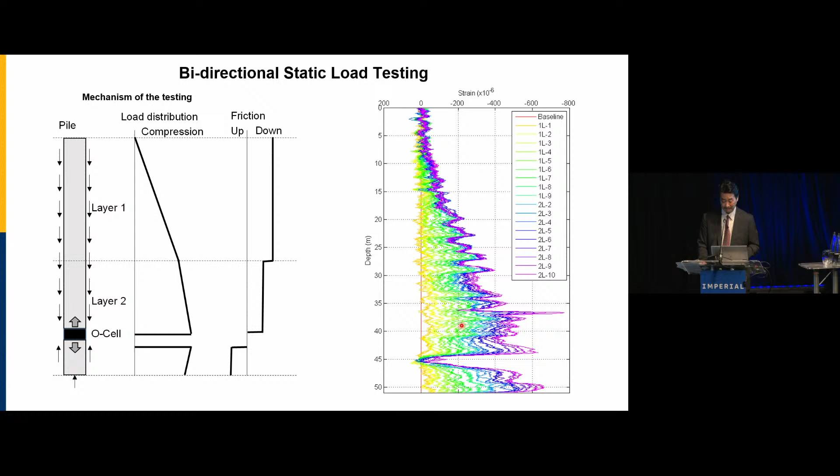This indicates that the shaft friction is progressively mobilized with the increasing load. Vibrating wire strain gauges were installed in this pile, and the recorded values for a given load are plotted against the distributed strain data shown here.

Correlation between the two data sets seems reasonable. However, the variation in strain, or the waviness observed in this distributed fiber optic data, is somewhat disturbing. And many of my colleagues didn't like it.

Again, the waviness is exaggerated due to its scale, but the strain variation is gradual spatially, like the one I showed you in the thermal profile image. And there are many points to make about this waviness.

The previously shown data represent the average strain of the 4 cables that we had. When the data of each strain cable is plotted separately, it is interesting to observe that all exhibit a similar waviness pattern, despite being entirely independent parameter measurements.

The spatial data interval is about 10 centimeters, meaning that waviness is not the result of an individual data point fluctuating up and down. It's a rather smooth transition across multiple readings. I'll revisit this issue later on in the presentation.

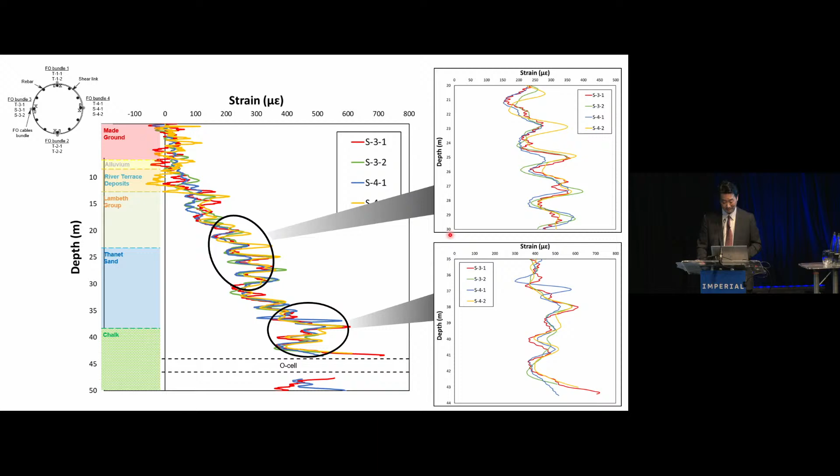As shown in the previous slide, the displacement profile can be derived from the distributed fiber optic strain data. Furthermore, by assuming a stiffness of the pile, the force distribution along the pile can be computed, and the gradient of the force profile is directly proportional to the mobilized friction.

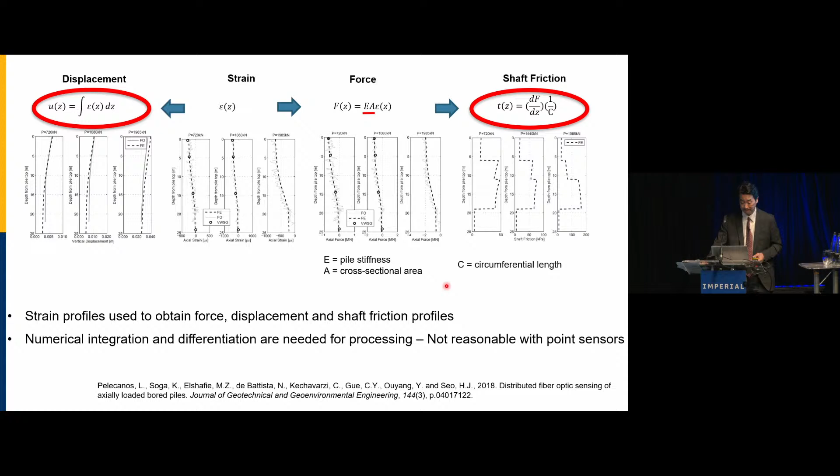The t-z soil spring analysis is commonly used to evaluate the load displacement characterization of a pile. Using the procedure I outlined earlier, the TZ relationship for different soil layers can be estimated, as illustrated in these figures. In these graphs, the vertical axis is the shaft friction in kPa.

The horizontal axis represents the relative displacement between the greenfield soil and the pile. The TZ curve for the Thanet sand exhibits well-defined mobilization of shaft resistance with increasing displacement.

In contrast, the TZ relationship for the Lambeth group shows an initial slip-like behavior at the beginning of displacement, followed by a rapid increase in shaft mobilization.

It is possible that the minor necking, or minor contribution here derived from the thermal analysis, contributes to this TZ relationship in the Lambeth group. A larger diameter in the Thanet sand may have played a role in more effective mobilization of shaft resistance.

The key takeaway is that if fiber optics can be embedded during construction, it is possible to use the data for construction quality control, real loading, future-proofing against earthquakes or nearby construction, and reuse.

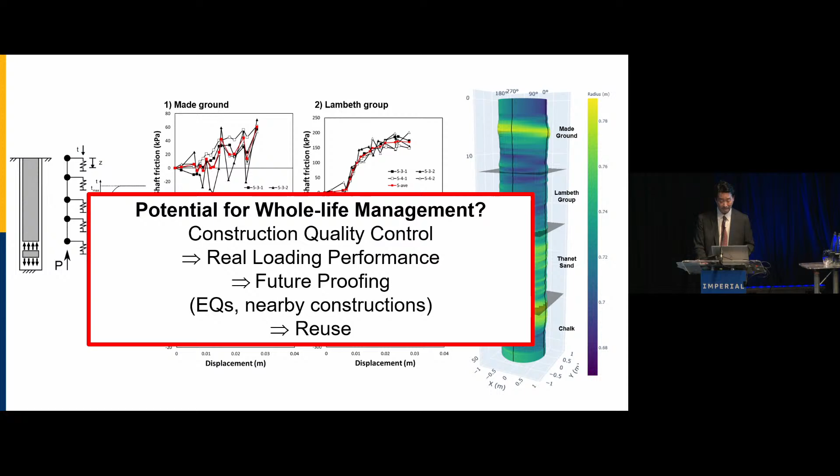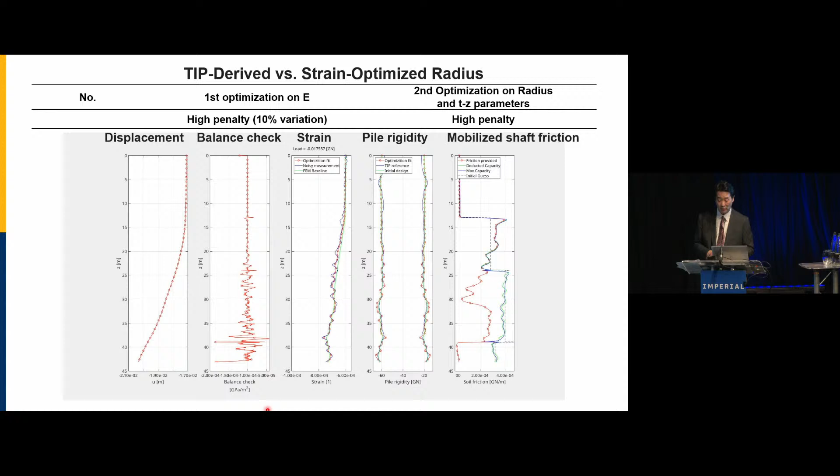The figure on the left illustrates the optimized variation in Young's modulus. To obtain realistic constraints, we limited the optimization so that the Young's modulus did not vary by more than 10%. Lower values were derived in the Lambeth group section compared to the Thanet section.

The middle graph, in red, shows the radius profile obtained from the strain data with the optimization, while the thermally derived apparent radius profiles from the thermal measurement are represented by other colors. It's important to note that both sets of data are calibrated once, so this doesn't represent the actual radius, but shows the variation potential in the radius.

However, when we calculate the gradients of these values and plot them together, we obtain the figure on the right. This comparison shows the gradient profiles align relatively well, suggesting the waviness observed in the strain profile corresponds to waviness derived from the thermal integrity test data.

So this, for me, is really interesting. I'm not sure whether it is for you, but that's what I wanted to show.

In this case, monitoring enabled the estimation of the pile radius profile and the assessment of pile performance at various locations during loading. Key takeaway was the relationship between shaft mobilization, soil properties around the pile, pile diameter, and construction effects, which enhanced our understanding of soil-pile interaction.

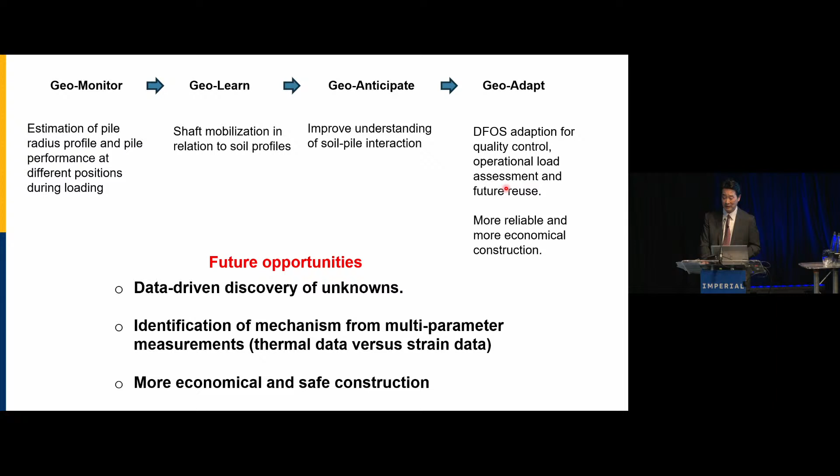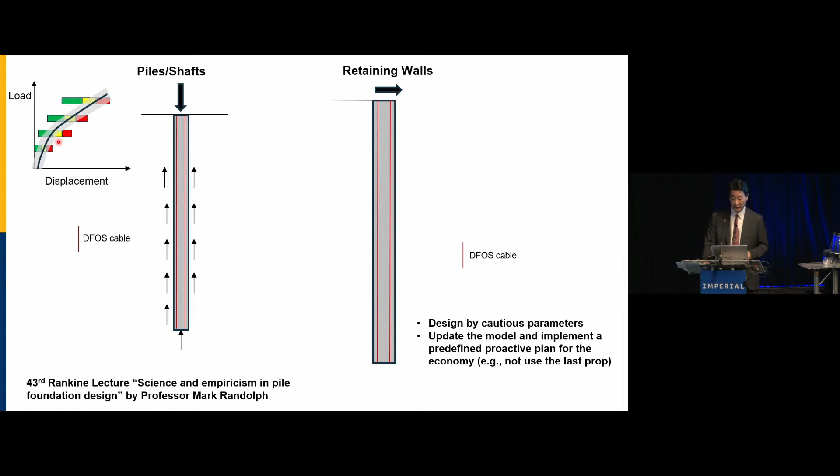In pile tests, we typically measure load settlement at the top, and we may have green, amber, and red at different steps. However, with distributed sensors, we can gain deeper insight into how the soil layer adjacent to a pile contributes to the overall soil resistance.

Comparing displacement and shaft friction provides valuable insights into the shaft mobilization mechanism at different loads, different pile displacements, and different soil layers. Although I have not shown any retaining wall case today, a similar approach can be applied here.

As shown, as you excavate, you can have green, amber, and red. During the design stage, we can conduct two designs, with and without the last prop support, and define green, amber, red for each design at every excavation stage.

The model parameters of the two staged designs can be updated during the construction stage. If appropriate, and if you're confident with your 50-50, the design without the last prop may be selected, which saves both construction time and cost. So we may not have to use the red one to go further and go to a deeper excavation.

If the monitoring data is in the red zone, we need to take immediate action because it's beyond what you've set as cautious parameters. If the monitoring is within the amber zone, shown in the middle, the actual ground is a bit worse than average; the data needs to be reviewed, and we need to keep everyone informed about the progress. If the monitoring data consistently shows they are in the green zone, it is possible that it is over-designed.

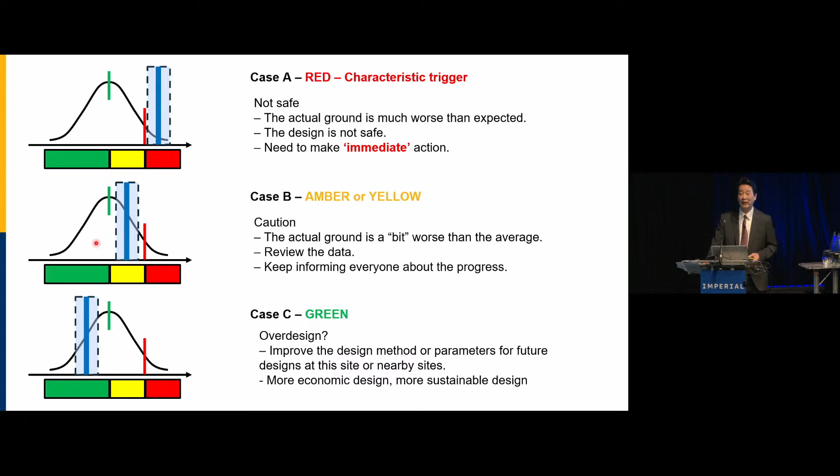Over-design can come from selection of engineering parameters, and many Rankine lecturers here today have explored the degradation of stiffness from small strain to large strain. By conducting back analysis of case studies using distributed strain data in addition, we can refine our approach to select appropriate stiffness or strength values, leading to more efficient and informed design choices.

We also recognize the complexity of soil behavior. Laboratory measurements are conducted along specific stress paths, often using disturbed soil samples, whereas in the field, soil behavior is influenced by the combination of different shear modes and construction effects. Over the years, here in London, by experience, we have accumulated valuable knowledge to refine our design approaches.

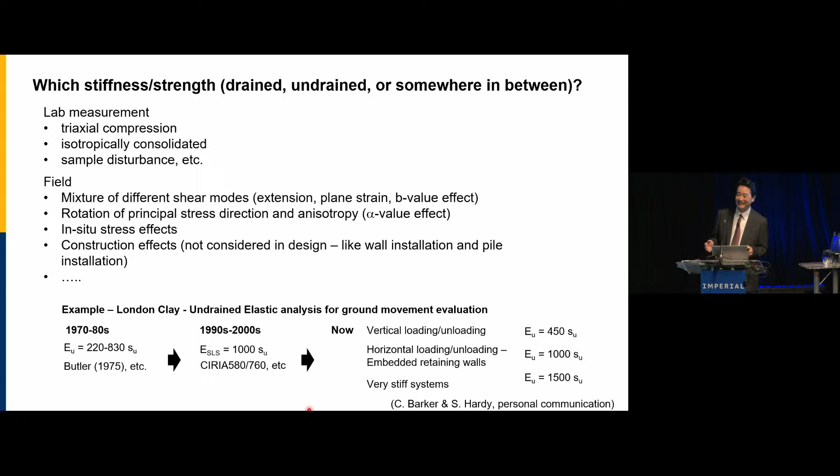For instance, in undrained elastic analysis for ground movements evaluated in London clay, the values of undrained Young's modulus have been updated to support more economical design. In the 70s, we had these values, but now stiffness values account not only for loading direction, reflecting the anisotropy of the clay, but also system stiffness. However, it's taken 50 years. We need to do this faster and more economically.

So I want to emphasize that these ideas are not really mine. They come from a series of studies discussing the next generation of the observational method, which have been proposed and developed by many researchers over the past decade. I would like to acknowledge them for their contributions.

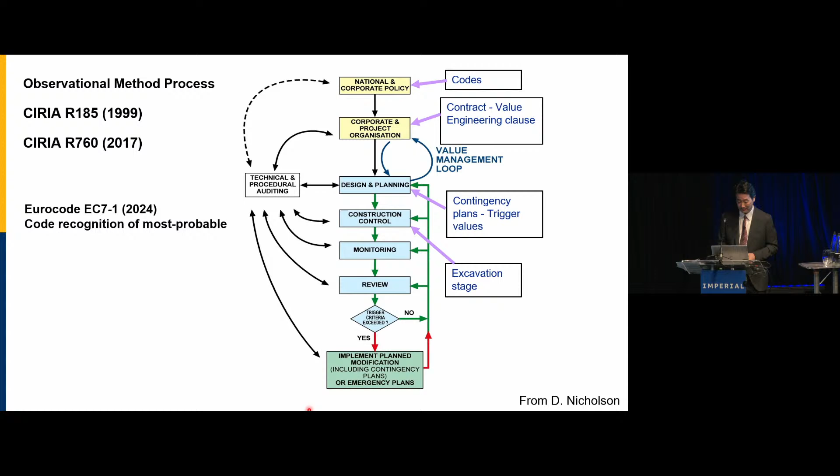There are several guidance documents available for applying the new generation of the observational method, enabling more economic and efficient design. The recent Eurocode has incorporated the concept of most probable value, further reinforcing this approach. Also, there are ongoing initiatives in developing a robust geotechnical database, and we have advances in data analytical tools, which enhance our ability to assess and improve geotechnical infrastructure performance.

So in summary, the engineering assessment can start with predictive performance, using both most probable and cautious parameters. Monitoring is then conducted to evaluate where the collected data falls within the various categories of green, amber, or red. When multiple readings are obtained during construction or at nearby sites, decision parameters can be refined through back analysis, which represents the learning stage. We can continue this cycle until we're confident about our 50-50. Then we can adopt a new norm. So let's try to find out more about our 50-50.

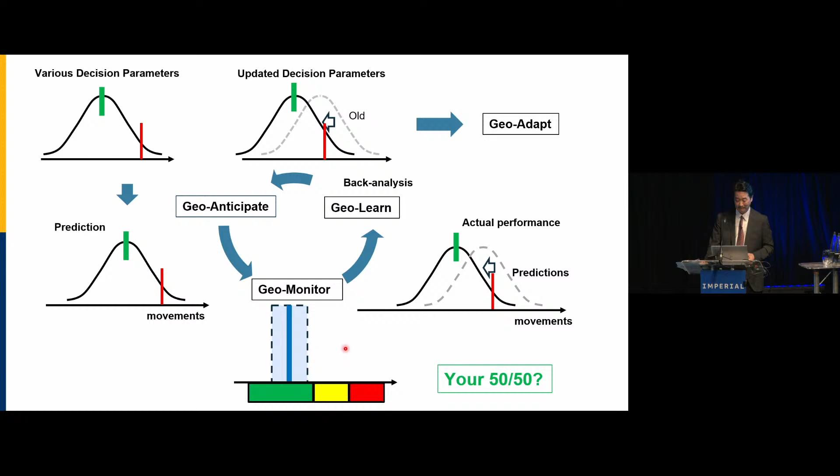In summary, my talk today aimed at highlighting innovation in sensors and data analytics. They provide exciting opportunities to understand the actual performance of infrastructure during construction and operation. For instance, embedded distributed fiber optic sensors can provide valuable strain data that no other sensor can offer. A monitoring system should be integral to the construction package. This ensures long-term proactive operational monitoring, contributing to quality control, maintenance, resilience against hazards, and reuse.

The new generation of observational method is a proactive integration of design calculations and monitoring. This means use of cautious parameters and most probable parameters, and understanding of how they behave. This in turn allows us to acquire knowledge from the monitoring data and appreciate different mechanisms and uncertainties. The overall goals are to enhance economic efficiency and to ensure future sustainability. So we can start by testing our 50-50 using our sensor technology and data analytics.

The work presented today is a result of contributions from colleagues I have had the privilege to work with in the past and continue to collaborate with today, from the University of Cambridge Center for Smart Infrastructure and Construction, and from UC Berkeley Center for Smart Infrastructure. Field work requires a lot of collaboration, and many findings today are from their hard work. While there are too many to name individually, I want to express my sincere gratitude to all of them for their brilliant insights and support. Thank you very much for listening.